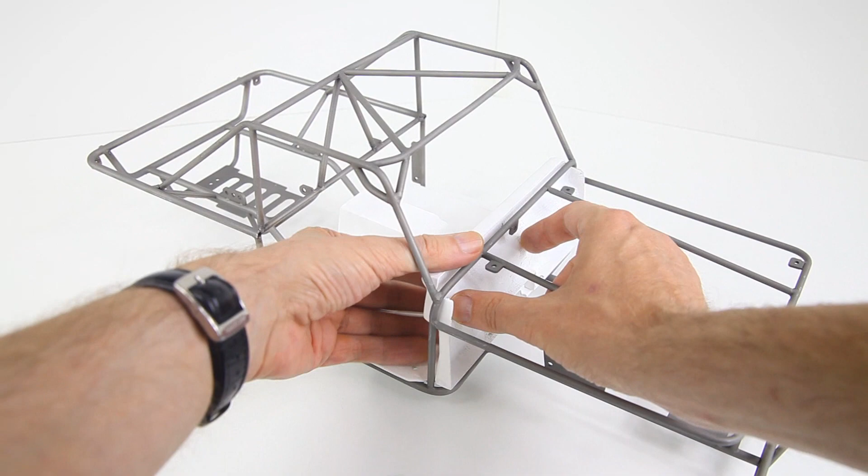Next thing is the dashboard and the firewall, which was also held on with a couple of screws. I've already taken those out, and let's see, how does this come off? Oh, like so. Oh yeah, there it is. Okay, the firewall and dashboard, which is also fiberglass, and the kit comes with a decal, a dial over here and a grey patch over here. Okay, and the manual says to paint this part up in black. I'm gonna do something different probably, but you'll see in the coming videos.

And we have a floor pan. Okay, so this is also fiberglass, and again the manual says to paint this up in black. I'm not sure yet. I'll probably paint at least part of it in black. Which leaves us with the metal chassis. And let's have a look.

Shock towers over here. This over here is a mount for a winch. And that actually sits behind the grill. So if you opt to install a winch, you won't see it. Yeah, and over here this is the mount for your steering servo. Okay, so we'll see how everything fits to this body in the rest of this video.

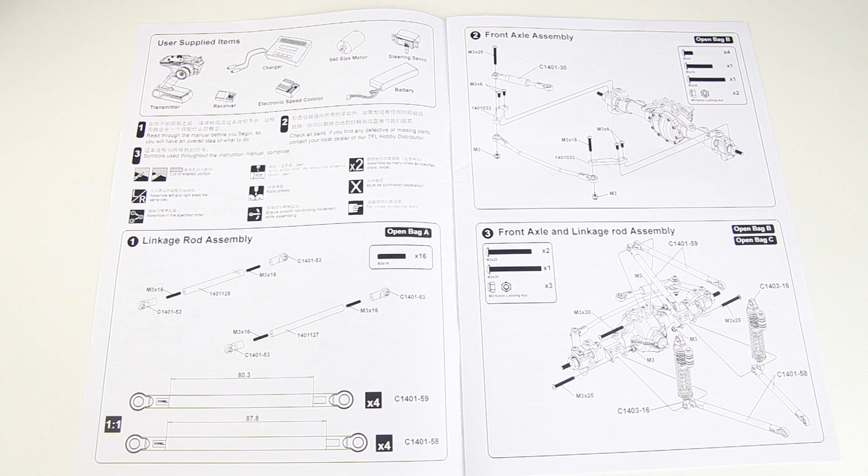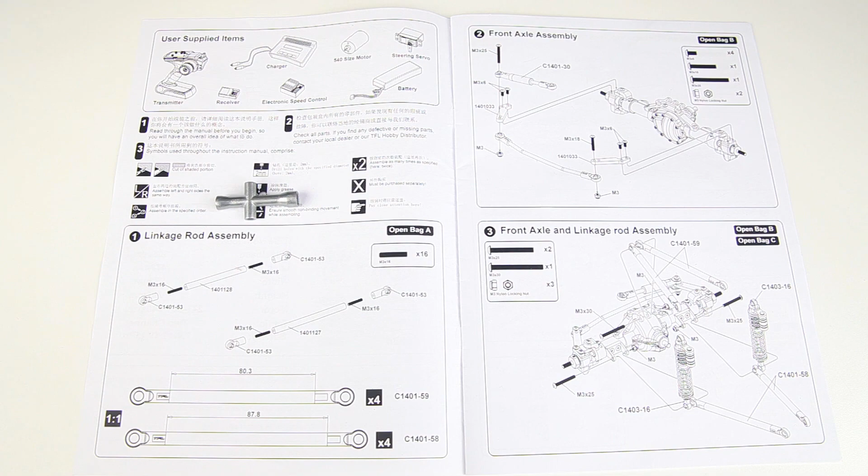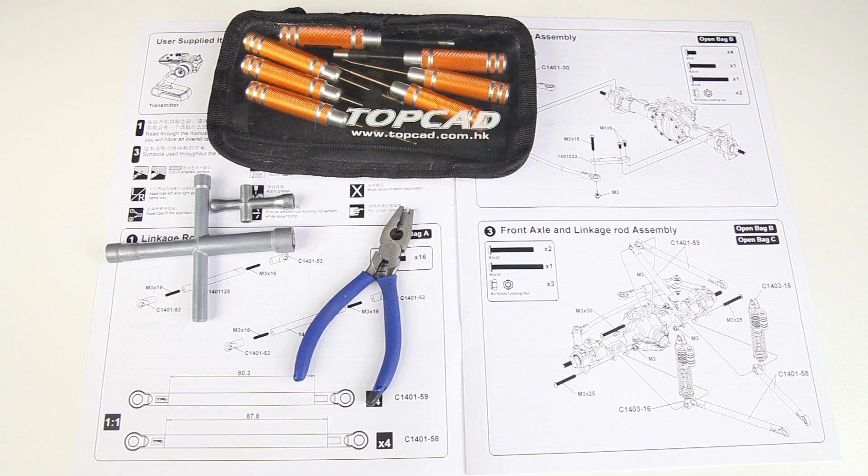Okay, let's first have a look how the manual helps us out in this build process. Is it detailed enough? And does it actually tell you what you need to know? Now, before we go into that, the kit doesn't come with tools. So you obviously need a cross wrench like this, or a bigger one. You need a couple of hex drivers, maybe a pair of pliers. You sure do need some thread lock, by the way, because you'll be screwing into metal with metal screws.

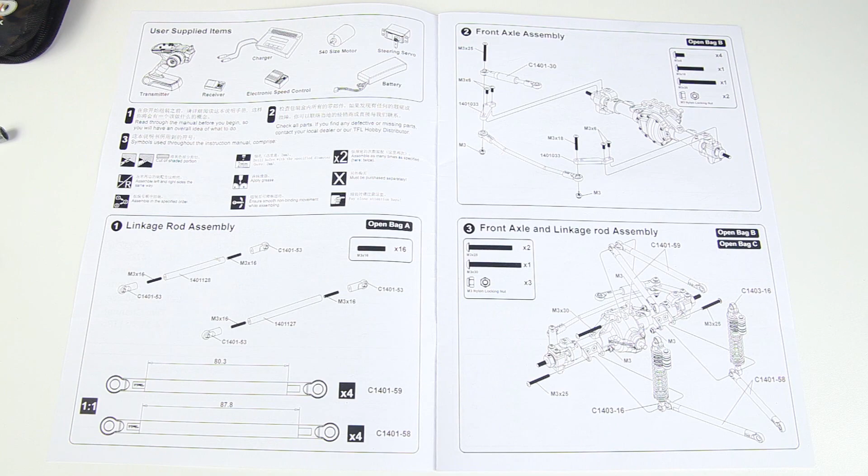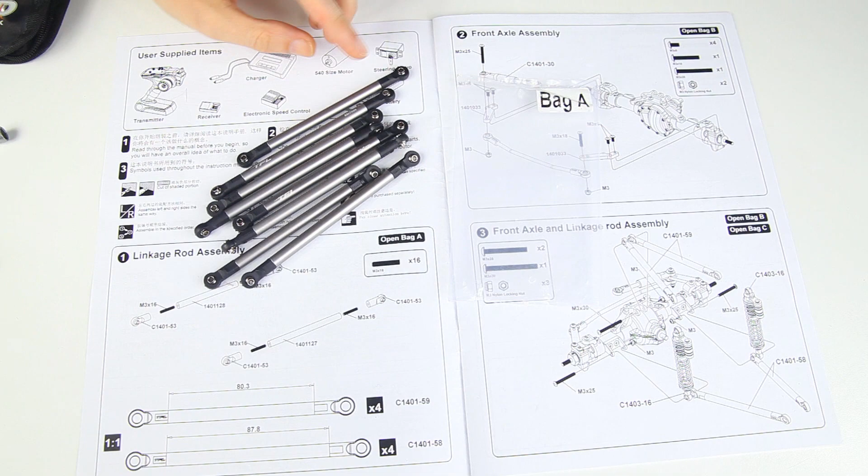Step 1 deals with these. As you can see, step 1, bag A. So that's nice, every step tells you what bags you need to open. Bag A contains these, the link rods. Nice, by the way, that the links, I'm not sure if that's visible, have a TFL logo, but also the length of that link. Step 1 tells you how to get these assembled, but the kit also already has them assembled for you.

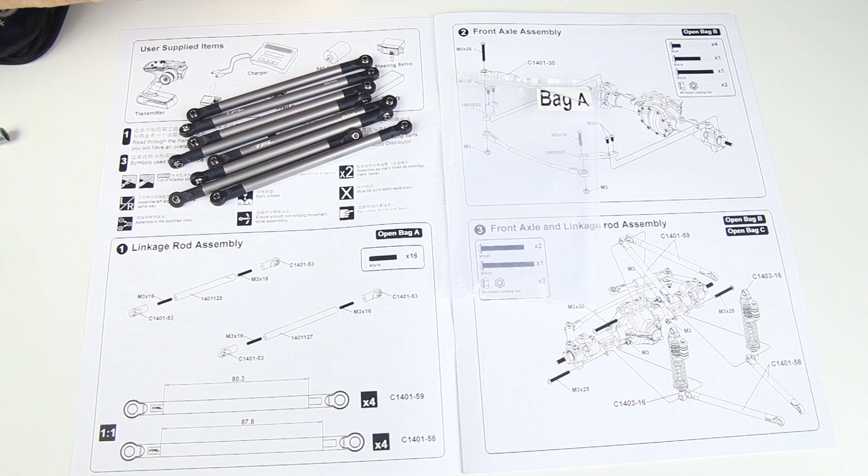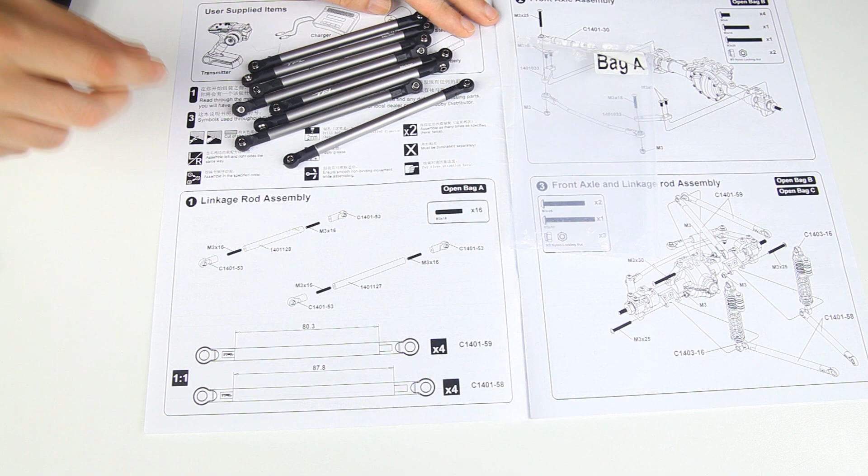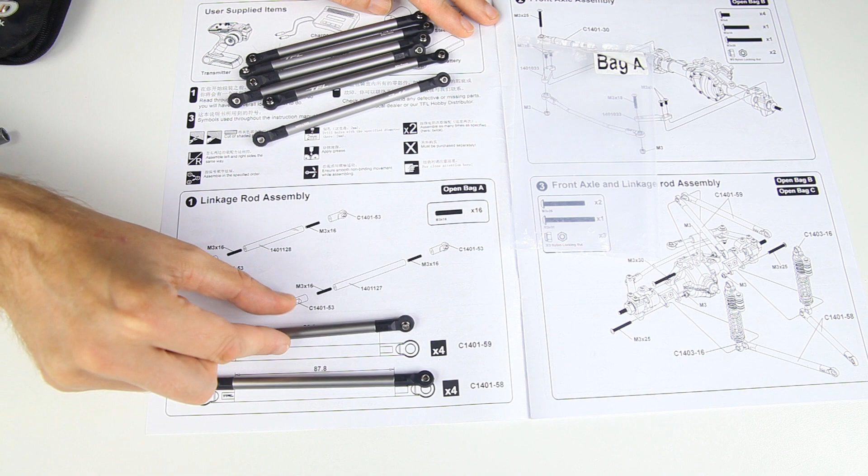But the second nice thing about this manual is that these diagrams over here show the part in actual length. So if you take a rod and hold it up against the drawing, you can check if you've actually got the correct one. And as you can see, there are short and long rods, 4 of each. The manual also shows you what screws to use, and again, these are true scale, so if you hold the screw up to that diagram, you can check if you actually have the right screw at hand. Okay, so much for the manual. Let's go to step 2 here.

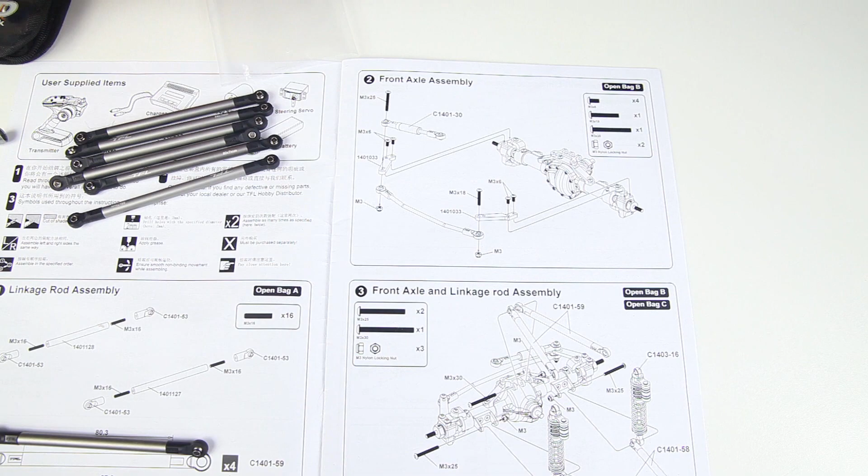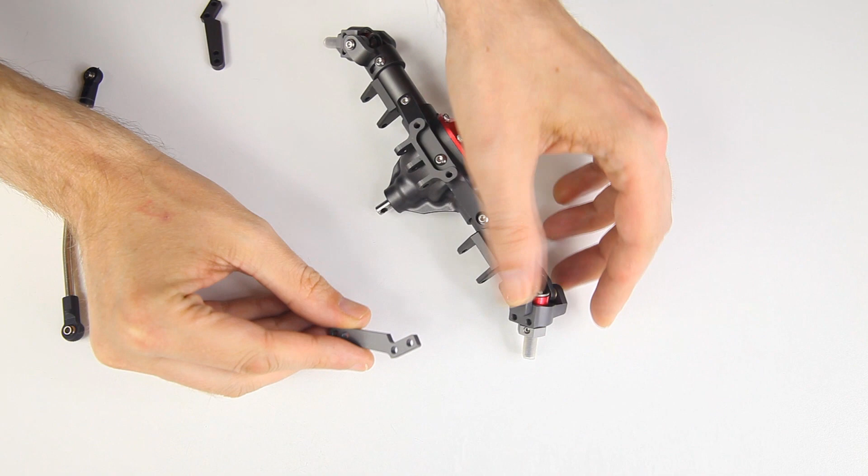Alright, the manual first tells us to go and assemble this front axle. Well, the axle itself is already assembled, as you can see. We're first gonna screw these metal things up to the front of the axle, like so. And let me quickly do that. Obviously do use thread lock, because you will be screwing into metal.

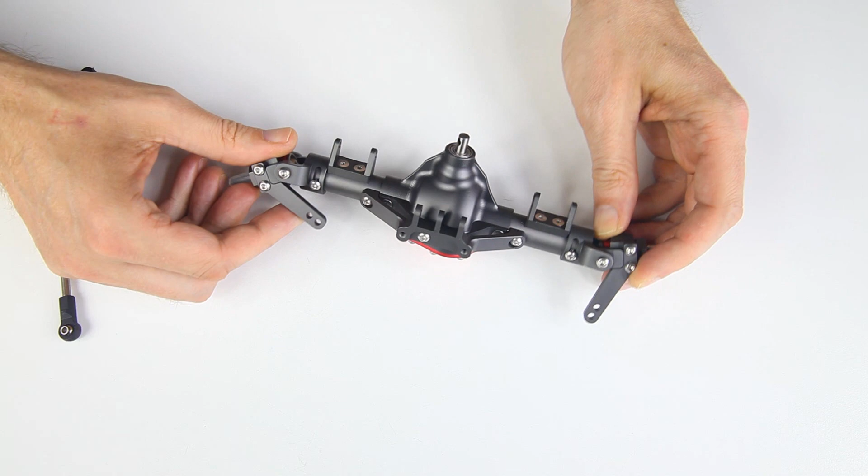In some cases you'll be screwing into these self-locking nuts. In that case you don't need to use thread lock, but in most other cases in this kit you do need to use thread lock. So please do, otherwise your car will fall apart on you. And there you go, we've got the steering knuckles properly assembled to the front of your axle.

Next thing is to attach this crossbar, which will, let's have a look, go through the front hole of these arms. And it'll go on the bottom of these arms as well. So let's see, we need one 18mm screw for the left side. And at the bottom you'll have one of the self-locking nuts.

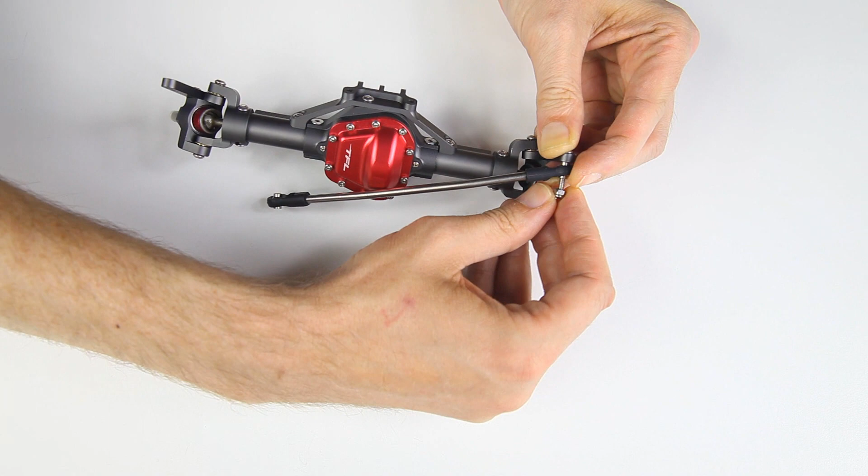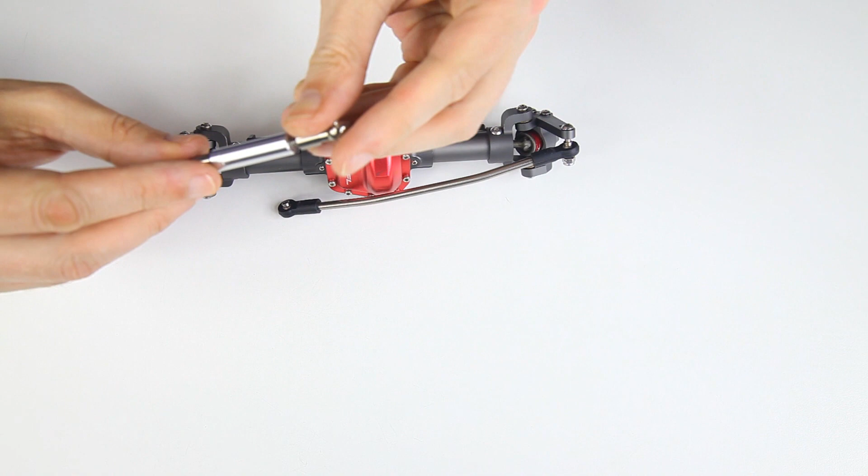There. On the other side, however, you'll also attach the steering link, this one over here, and it looks like a hydraulic steering dampener. It doesn't dampen or anything, it's just adjustable, right? So that'll go, let's see, what way will it look best? It'll go on like so, and for that we need a

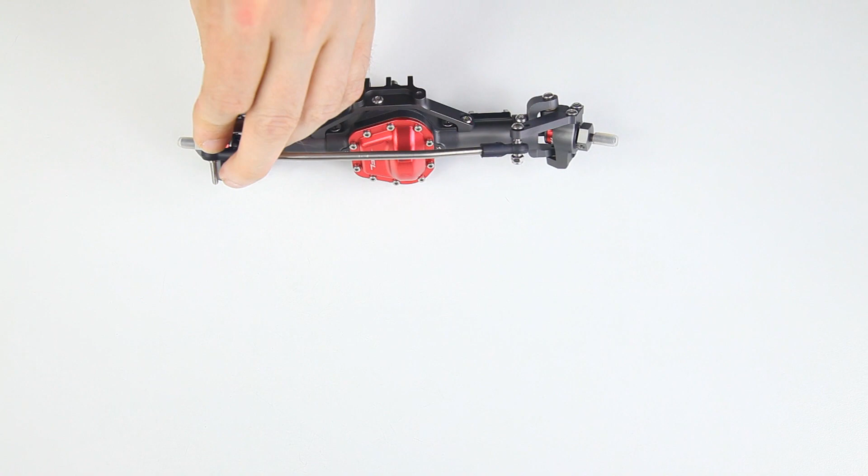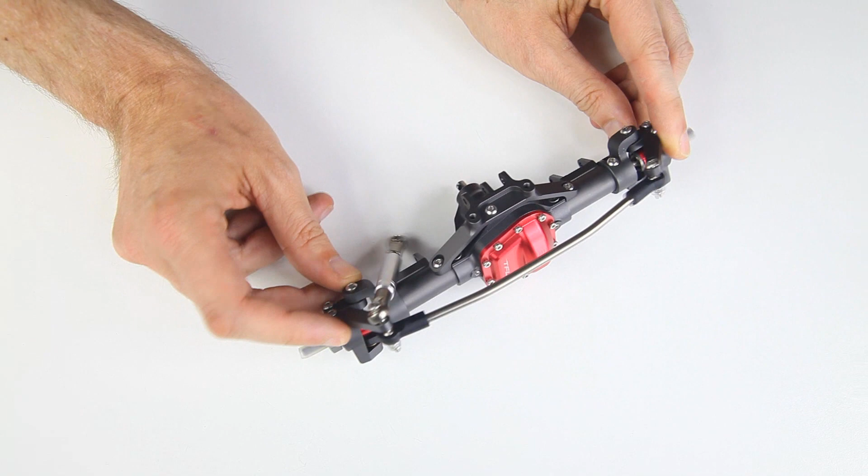25mm screw. This one over here, which will first go through that dampener, then through this steering knuckle arm thing, then through this link, and lastly we'll attach a self-locking nut. And with that all said and done, things will now look like so. So we've got our steering link system set up.

Next step is to attach the suspension links. So let's go and do that. First thing we need is 2 of the shorter links, and those will go onto the front axle over here. And obviously we need a screw, which will be the 30mm screw, this one, and that'll thread through these holes over here, and in between you'll attach these links.

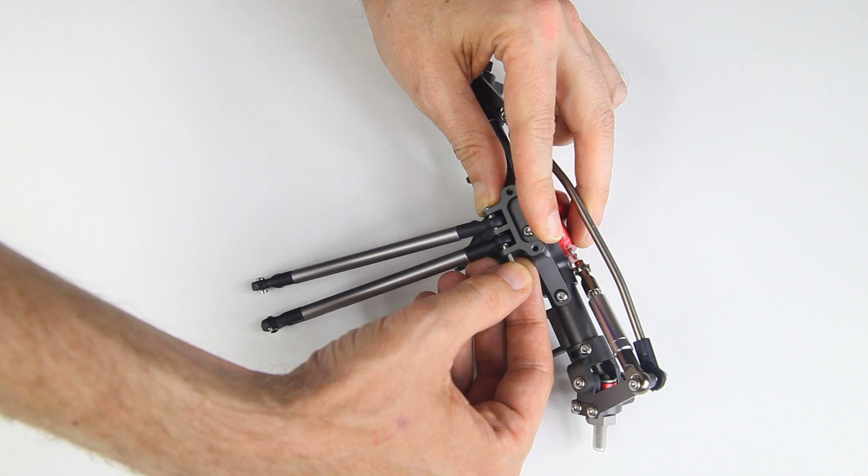And at the end you apply a self-locking nut. So again, no thread lock needed here. Making things look like this. Now, so far everything goes together well. However, this screw is a little long, as you can see. I'm not really a fan of that. I didn't use the incorrect screw. It's a little long. No biggie, but it could have been a little shorter.

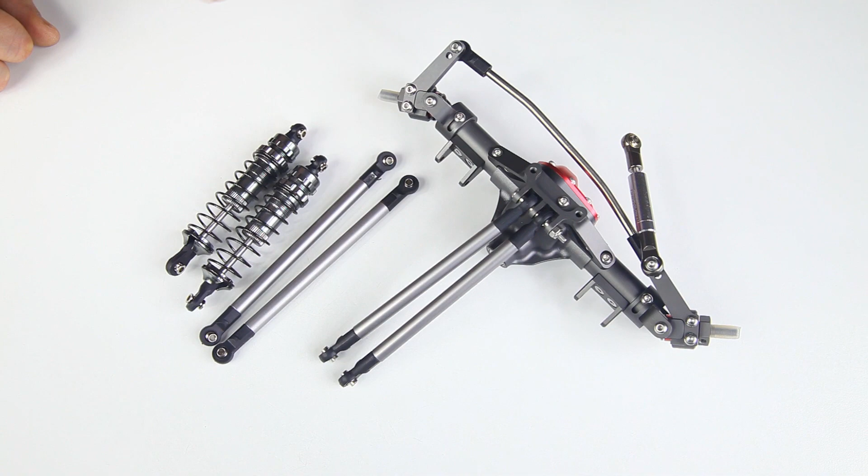Next we'll go and add links over here and the shocks. And these are the longer of the 2 links, by the way. Now this kit comes with the shocks fully assembled, but you do need to add oil, and if you are unsure of how to do that, I have a link to a video on how to fill your shocks up properly up here.

Okay, and we'll also need two 25mm screws and again 2 self-locking nuts. So again, no thread lock needed. And a minute later things look like so. And as you can see, the shock goes to the outside. And again, this is the longer of the link types, and those go onto the inside.

It was pretty impossible, by the way, to get the cross wrench in here to reach that lock nut. So I used a pair of pliers to hold on to that nut. Okay, no problem at all. So far everything fits together nicely, and we'll go and do mostly the same for the back axle now. Alright, the back axle, and mostly the same procedure, minus the steering links of course.

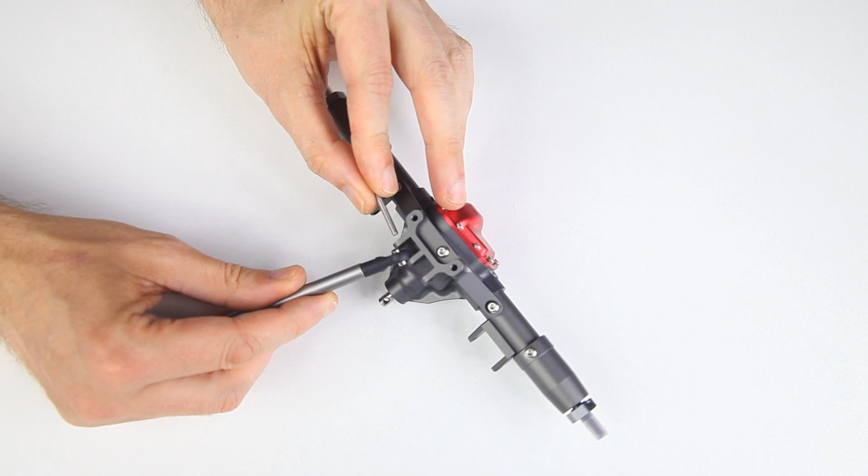At the top over here we will attach the shorter of the 2 link types, held on with a single screw going through the top. So let's go and do that. And again, you cap it off with a self-locking nut, which means you don't need to use thread lock. In fact, some of these self-locking nuts, they have a bit of nylon in them, right? They don't really like thread lock.

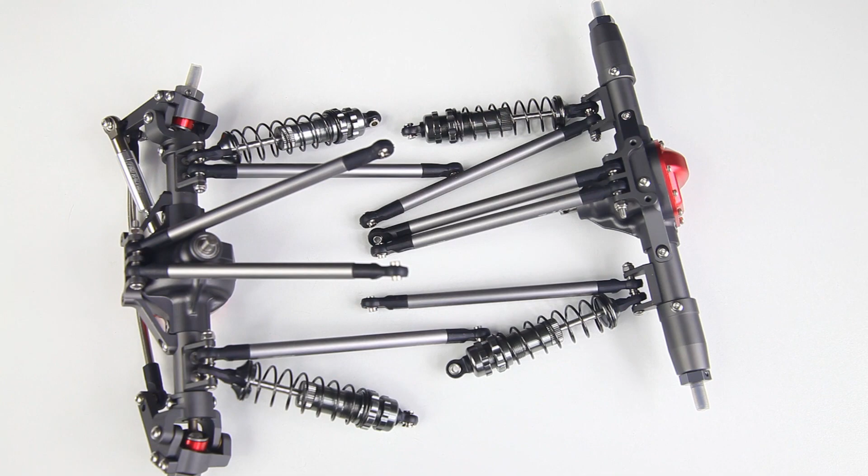Next up, again, just like on the front axle, is the shocks and the longer suspension arms. The shocks, by the way, are identical front to back, so you have 4 identical shocks in this kit. Okay, and the shocks will go on the outside over here and the links on the inside. After which we are left with 2 built-up axles with suspension links. Very nice, and so far so good, everything fits.

No spare screws as well, by the way. I do like to see that in kits, some spare screws, some extra screws in case you mess things up or something. But well, in this case so far exactly the right amount of screws.

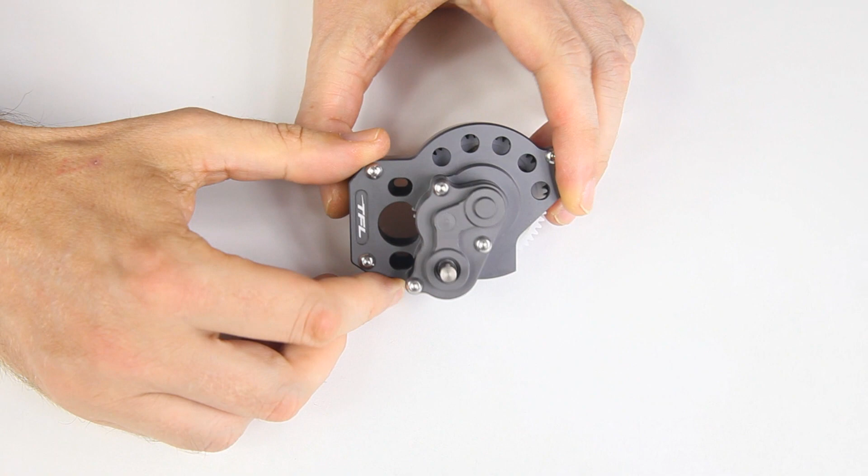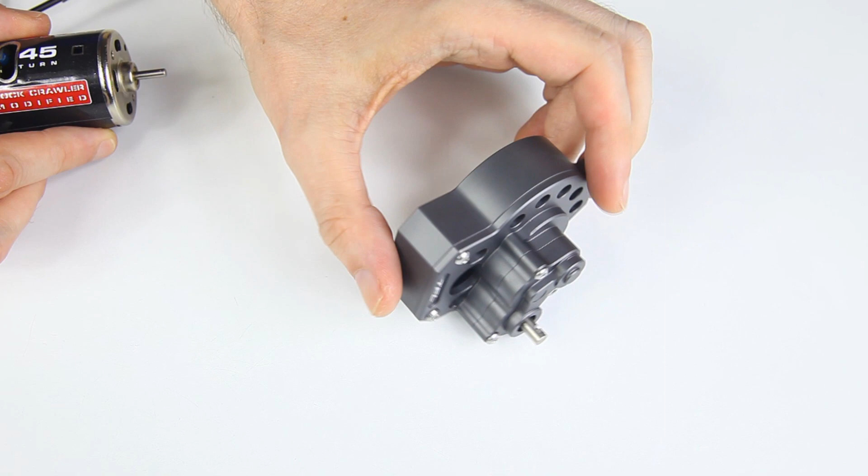So let's have a look at the transmission for this car. Okay, here's the transmission case combined with a motor mount over here. A motor can be attached like so, and as this is a kit, it does not come with any electronics, so no motor, you'll have to provide your own, and this is a 45 turns RC4WD motor, brand new. So I'll go and install that.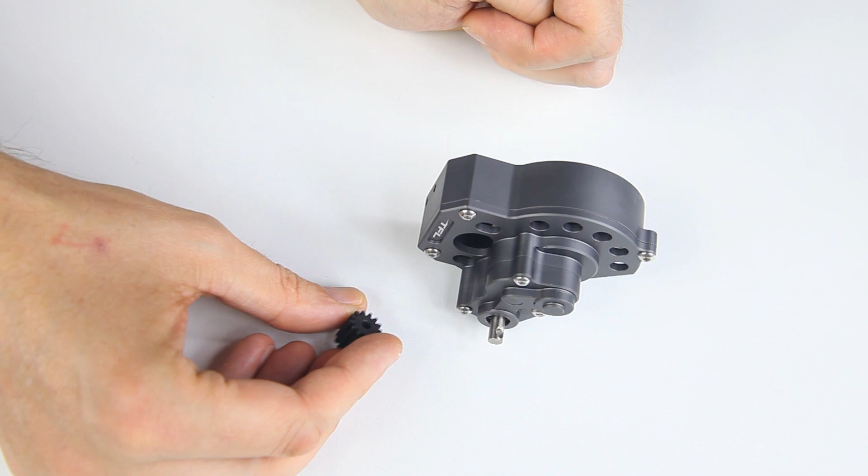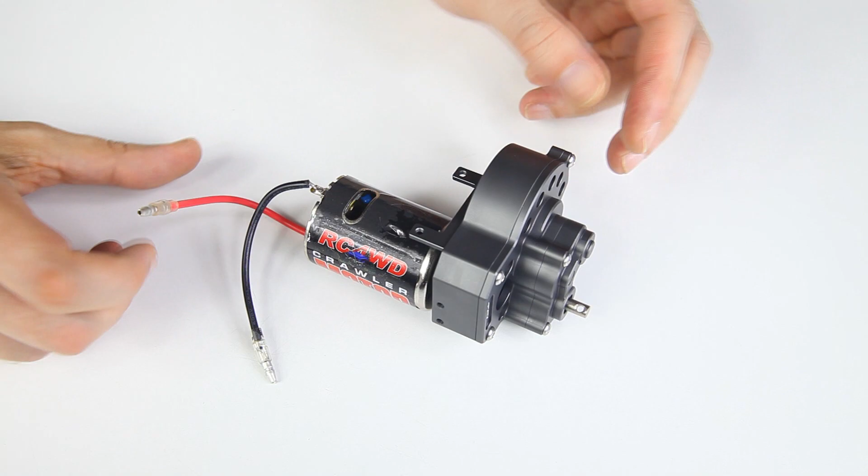The kit does come with a metal pinion gear and a little grub screw to secure that down. Obviously apply thread lock to that. And there we go, we have one transmission / motor mount with a motor, and this transmission has an adjustable slipper clutch. You can adjust that with this lock nut over here. Pretty easy to get to, by the way, so that's nice.

And I've also gone ahead and attached this bracket over here, this metal U bracket, which will support the engine cover like so.

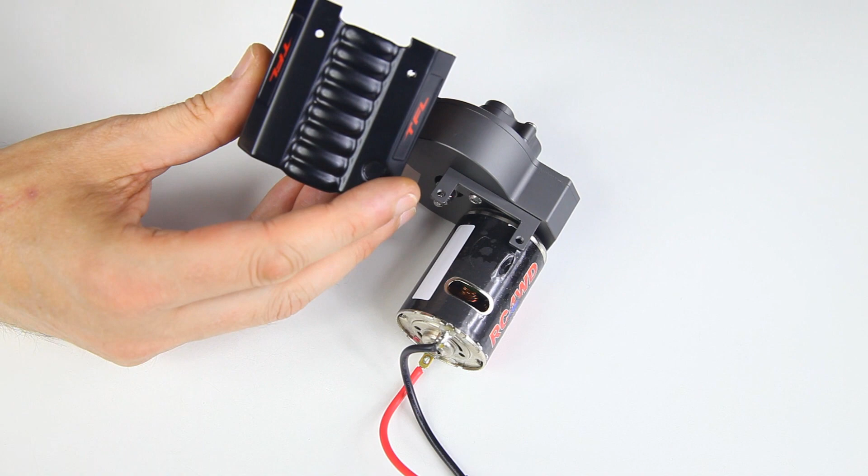And do I have a wire in the way? Yeah, I have to tuck in a wire. Okay, so this will go on top over here, and it's not really necessary, by the way. You could leave it off. It's attached with 2 screws. As you can see, it has 2 screw holes, and that's it.

In my case, I'll have to bend down this wire. No biggie, really. Should I have rotated the motor? No, it would have led to the same problem. So again, I'll have to bend this wire down a little, and then it will slip into place. And there is our lovely tubular chassis again.

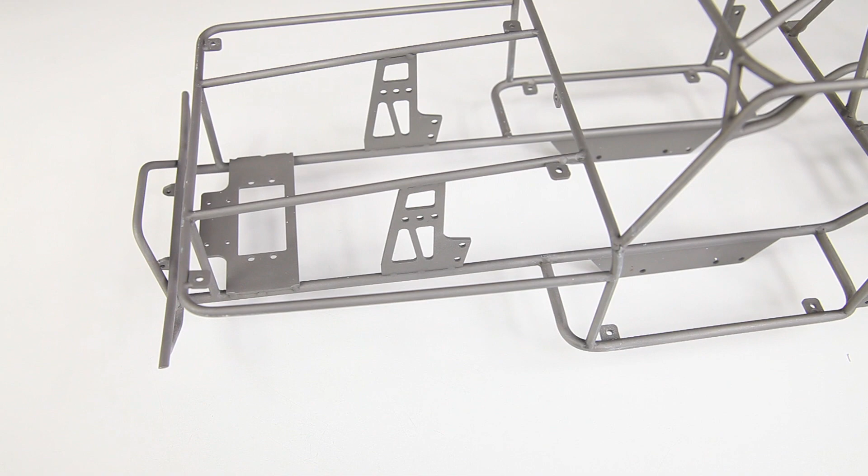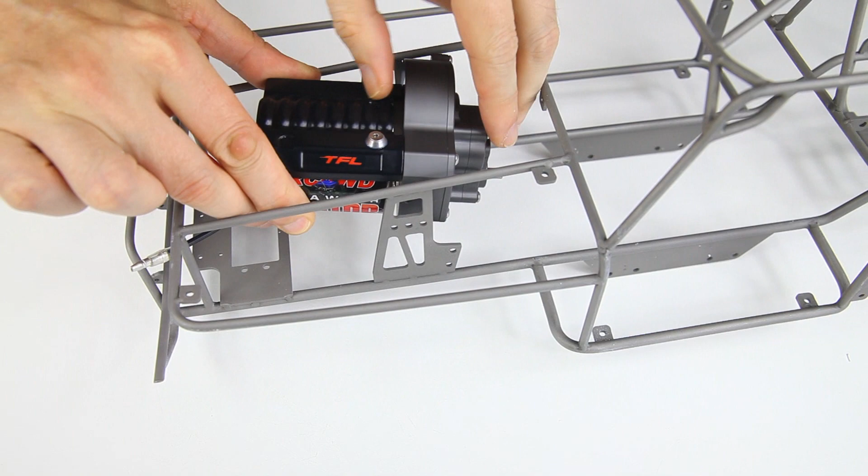What we'll do next is we'll install the transmission and motor into the frame. The manual actually tells us to now install the interior and body shell. Well, at least the interior. I'm not going to do that because I first want to paint it up. So that transmission and motor will live here, over here, like so.

Yes, and you see these two holes over here in the motor mounts, and on the inside of those two holes you will attach these spacer blocks. Pretty hard to see, one on either side, and those are identical and symmetrical, so no way to mount them the wrong way, and they'll be held in with 4 screws, 2 on either side, of course. So let me go and do that, and that looks like this.

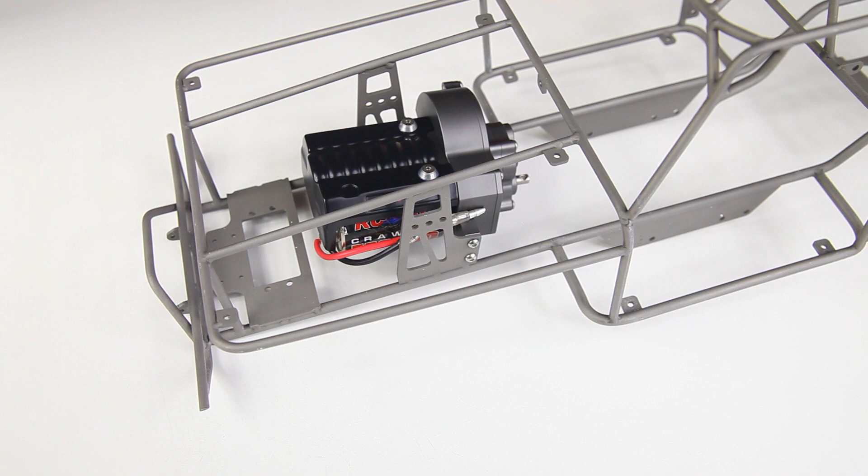So it's nice to see that the motor is actually in a realistic position, and this also helps for the CG to weigh down the front of the car, so that's good. The interesting thing to see here is that the motor and the motor mount are at an angle. It tilts up to the front over here. I'm not sure if that's really visible in the video for you,

but I guess the main purpose of that is to have the drive axle that protrudes out of the gearbox directed towards that transfer case that'll sit in the middle of the car. Speaking of, we'll now go and install that transfer case and the skid plate. And here is that central transfer case.

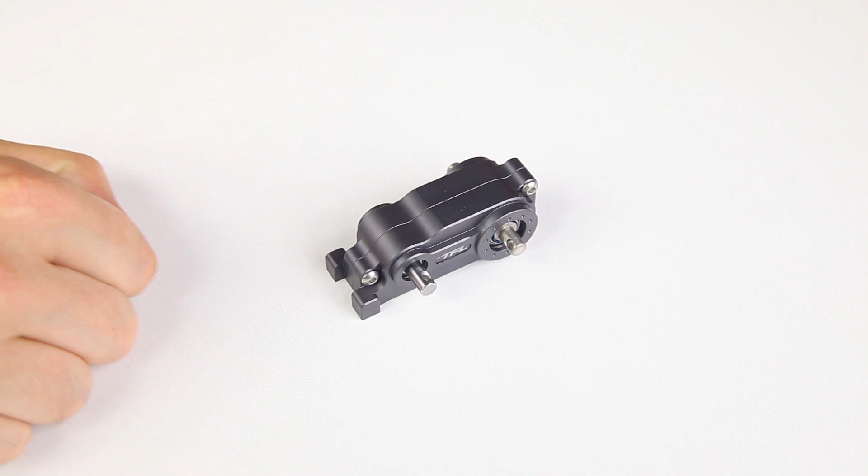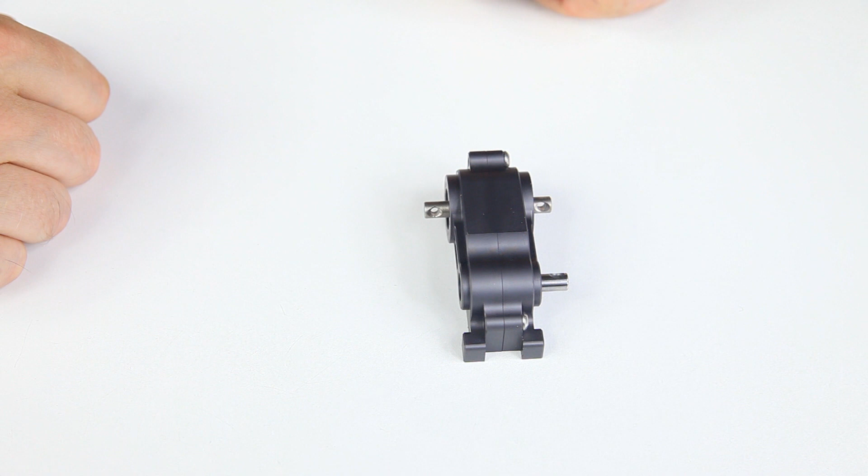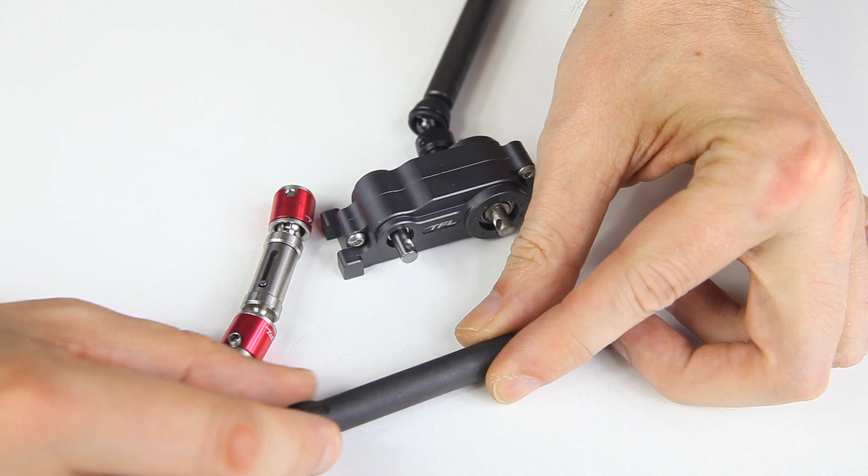One input shaft over here and an output over here and over here, which will run drive axles to the axles. Okay, so the first thing we'll do is install this input shaft and the 2 output shafts. And let's see, yeah, the output shafts have one side that is stationary, this side, and the other one is a harmonica kind of deal, right? And this part goes to the outside, so like so. And the same way for the other one, like so.

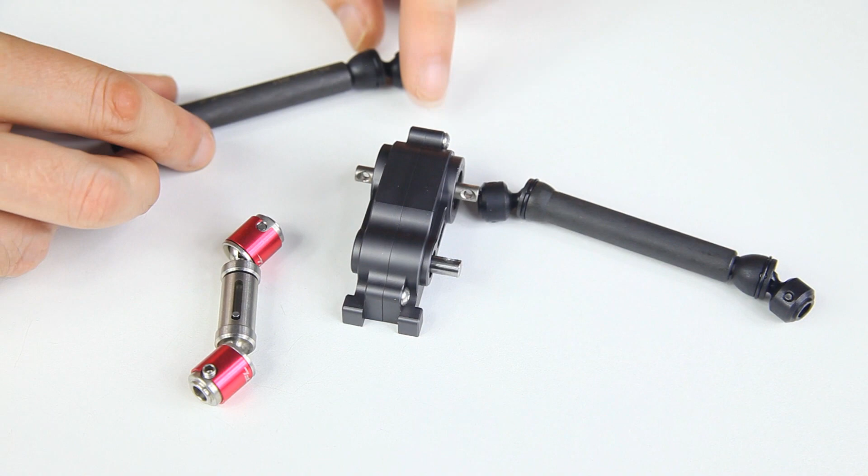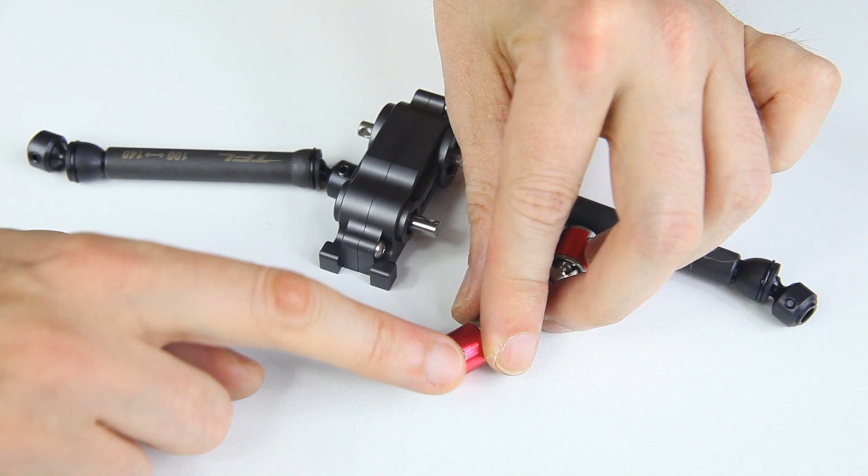And I don't think there's much of a difference for this one. These axles look as if they have grub screws, but they actually have pins that run through them. And as you can see, these parts over here, the input shafts, have a hole for those. And yeah, you do need to apply thread lock there, and that's basically it. So let's go and get those screwed on. There you go, looks like a transfer case to me.

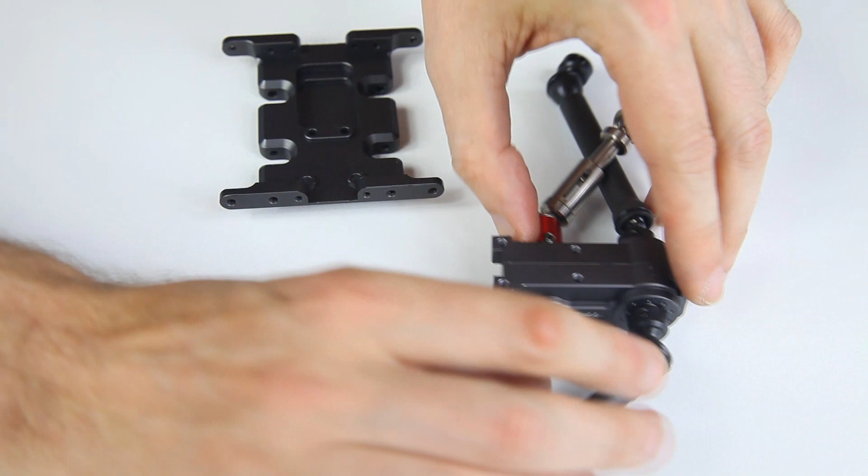And we'll now go and install that onto the central skid plate, which is aluminium. I think it feels pretty light, so I guess it's aluminium. This one has 4 screw holes, and those correspond with these 4 holes over here. So that's pretty straightforward. We'll go and install that now.

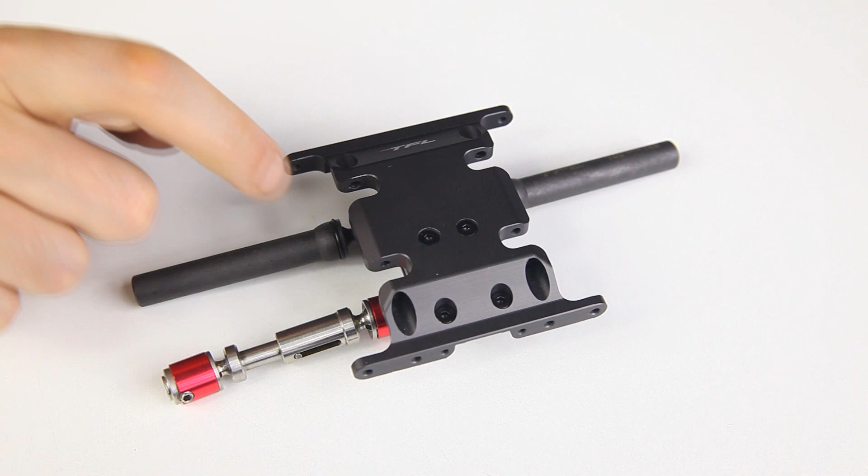Which is actually where the shit hits the fan. Yes, missing screws. These 4 screws are countersunk screws, as you can see. 2 8mm and 2 12mm. And those were missing. Ooh. Yeah, so again, it's handy to add some spare screws in kits like these. I had these screws, otherwise you'll have to run out to a hardware store and get yourself a couple of screws. Okay, the first little mishap in the build here.

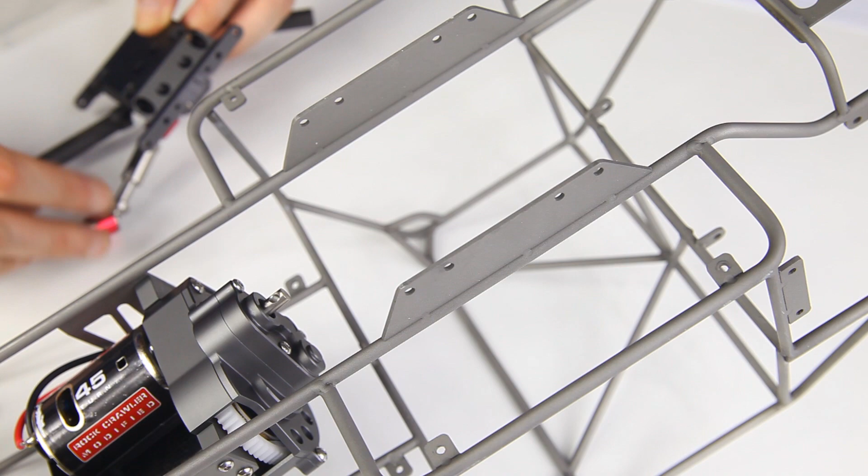Alright, and at this point we'll go and install that center skid plate with the transfer case attached to it to the frame, and it'll sit like so in between the frame plates, held in with 2 screws, and we'll also attach that drive shaft to the gearbox up front over here. Pretty simple, so I'll go and do that. And yes, those 4 screws are in the kit. Thank you very much. Alright, so this is where we are at right now.

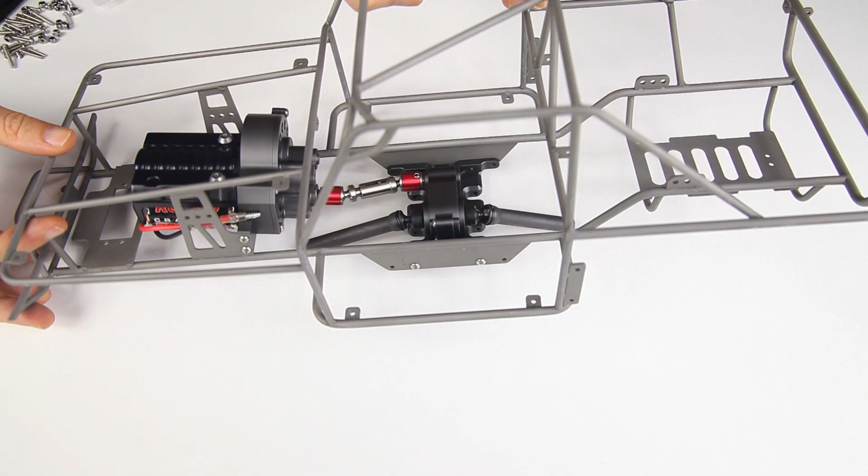Now you might have expected to have to use 4 screws over here, but these screw holes are to hold on swing arms. So we'll get to that once we attach the axles to our frame. Let's now add a servo to our car.

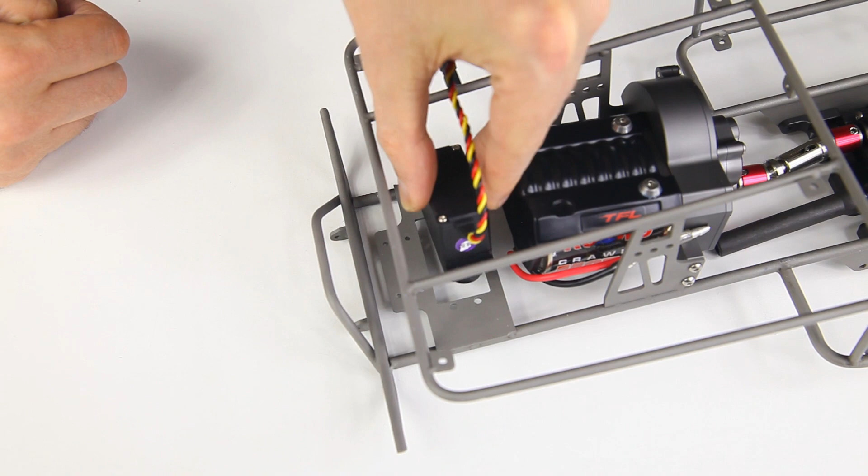Alright, at the front over here we have ourselves a servo mount, and the servo will be mounted upside down like so, with the arm positioned to the left side of the car. So here is the spindle for the arm, and it'll go in like so. And obviously the kit comes with 4 screws to secure it down.

Our car has a steering servo, and I first showed you a black servo, which was a Hitec servo. I reconsidered, and now it's a Traxxas 2075 servo. And I'm not sure if that servo is gonna be strong enough. We'll just see. I probably will just try the car with this servo. It's not a super strong servo, but it is waterproof, so that's nice.

Now the manual tells us to mount our receiver on top of the servo over here, which is possible, of course. I'm not sure if I'm really gonna do that though. I could mount it on the bottom side of the hood.

Yeah, or maybe where the winch would be, because I'm not going to be installing a winch. We'll see, there are a few possibilities, but first we're gonna install our axles, so here we go.

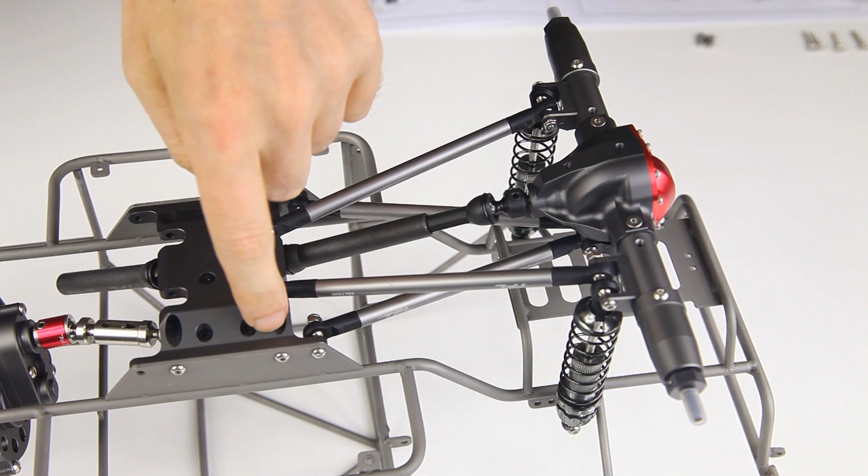Alright, as you can see, I've already gone ahead and mounted the rear axle here, and that was pretty straightforward really. As you can see, the suspension linkages all tie into this center skid plate over here, and the only 2 places you need to use Loctite is on these 2 screws holding on these bars over here. The rest are tied in with self-locking nuts again, so that's pretty simple.

And obviously the shocks here tie in to the frame itself. You've got some options over here. As you can hopefully see, you've got 3 mounting points for the shocks if you want to lay them down slightly. So you've got that tuning option. Other than that, there aren't tuning options here other than the shock oil you use. And obviously you can change the preload on the springs themselves.

So I do have one tip though, and let's have a look at the front axle for that. What I've done here, and I know this will look a little cluttered on screen, I've already attached half of the shaft connecting the front axle to the center transmission case, if you will. And my thinking was that it would be easy to then slide the things together, freeing up one hand. It's actually pretty hard to line them up this way with all them linkages on the axle.